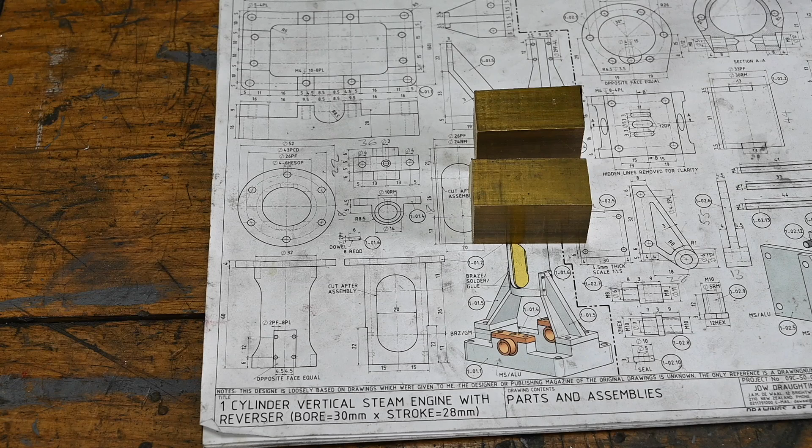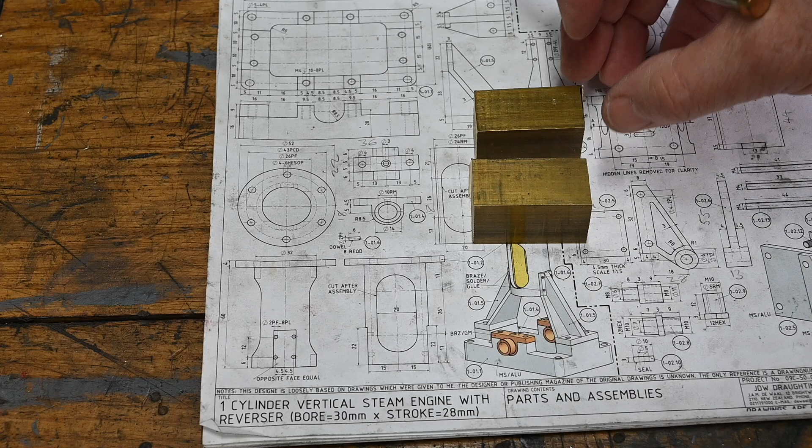Today we're going to do the crankshaft bearings, which are these two here. They should really be bronze, but as I've said in previous videos, this model is really for display. It'll only be run once or twice on air, so they'll be hard enough for that. This is what we're going to make them out of - a couple of small bits of brass from the scrap bin.

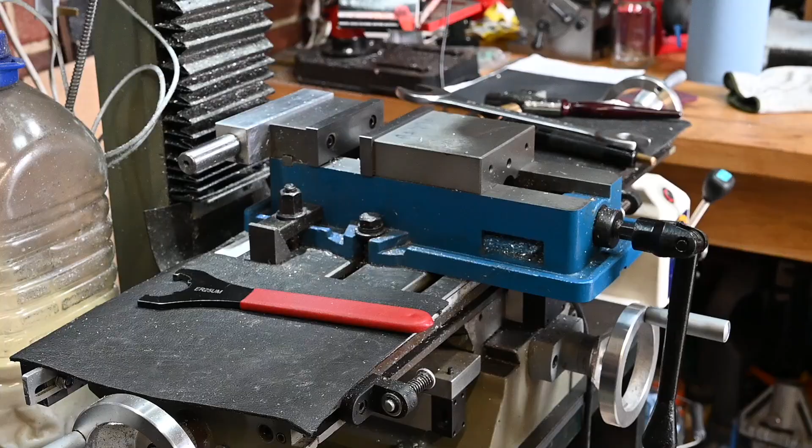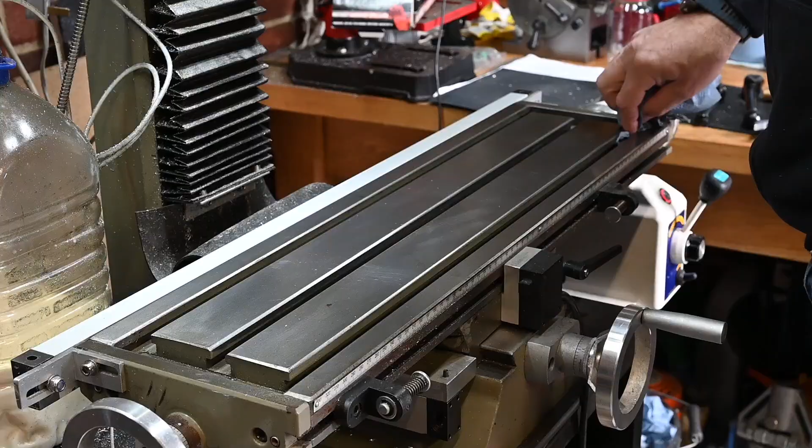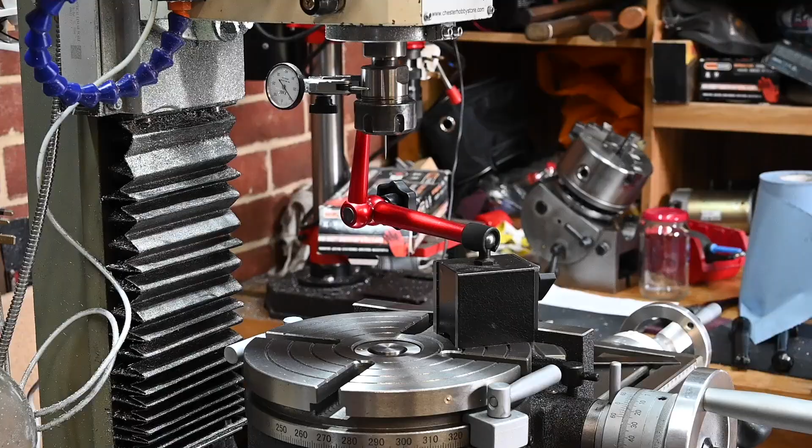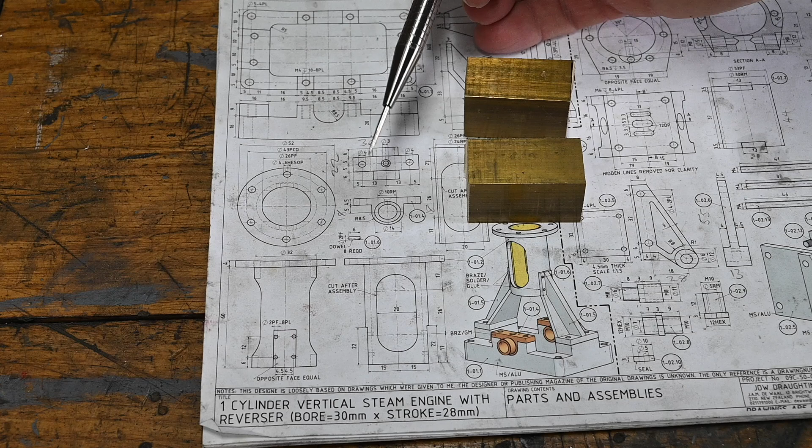Initially I set up the rotary table to do this, cut here, and then realised I wanted to do some milling first to tidy them up, but I'd already taken the vise off and put the rotary table on, so now I've put a little vise on the rotary table so I can get these sort of just machined down to somewhere near size, which is what we're going to do first. So over to the mill.

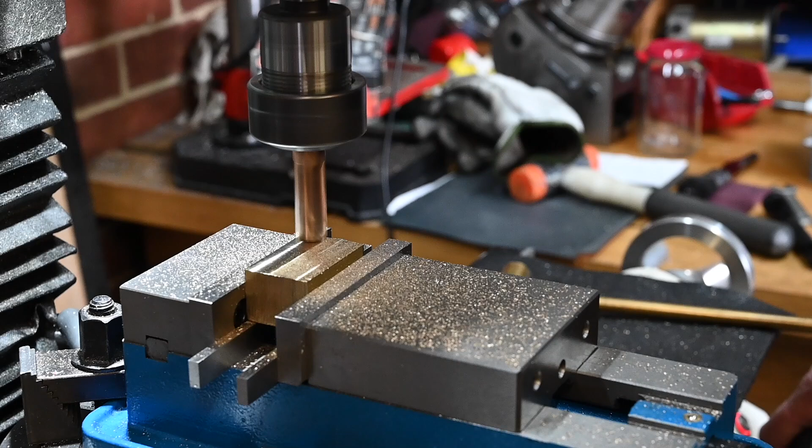Right, there's quite a lot going on in this video. In particular, there's some rotary table work at the end for such small pieces. There's turning, there's milling, there's work on the rotary table, there's precision drilling. So stick around right to the end, because there's quite a bit to see in this one. Goes on a little bit longer than normal, but it'll be worth it.

I'm just tidying this piece up, getting it all to not quite dimension. I'm going to leave it slightly oversized, but more or less to dimensions, so I can then mark it out.

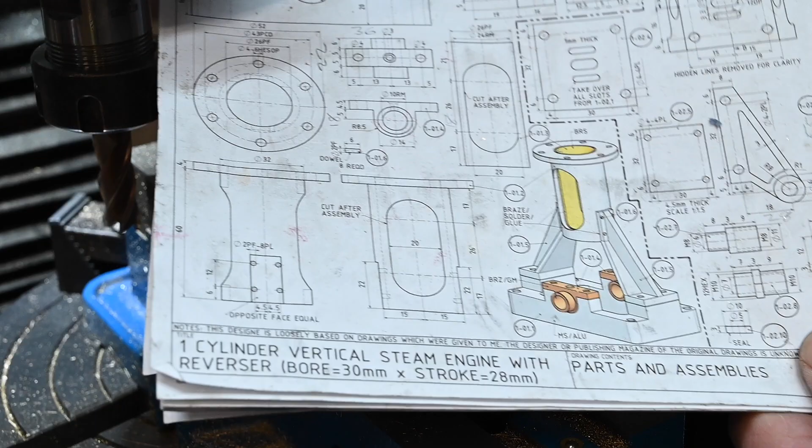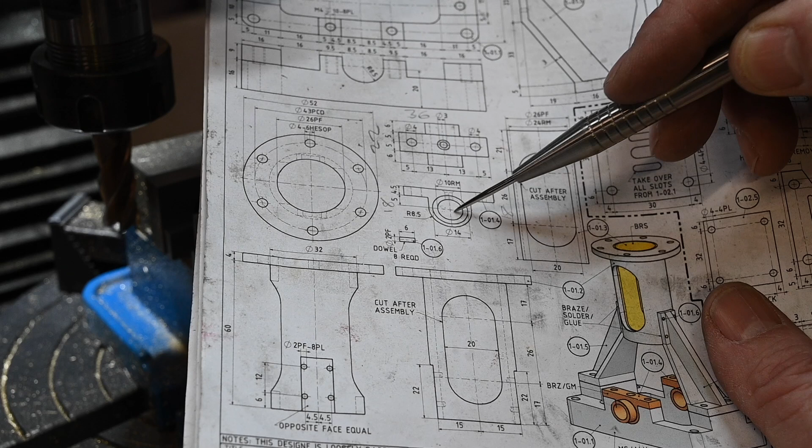Right, this is where we're at. This is the top face that we've just blued up. What I'm going to do is find the centre of this hole, and then I'm going to drill that out undersize - it should be 10mm reamed, but I'm going to drill it out undersize, and use that as the datum for everything going forward on the lining up of this piece when I put it in the 4-jaw, and when I use the rotary table to cut this piece. So that's our key point, getting that centre hole correct.

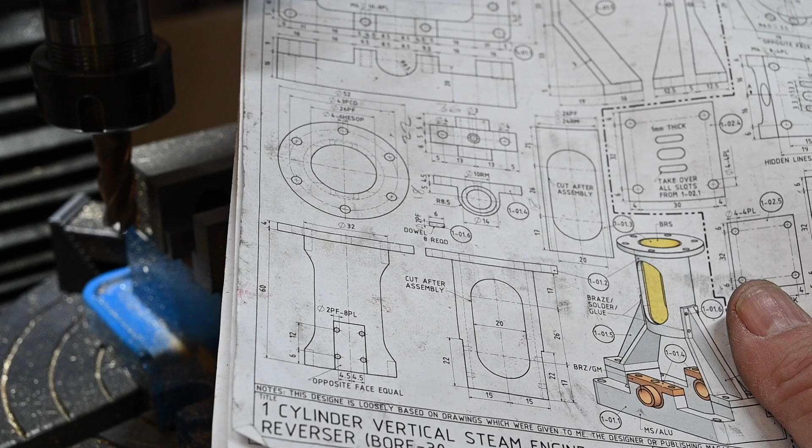Actually, I don't know why I blued that up, because I can actually find that centre hole by putting it in the vise. Using the DRO is going to be more accurate than me trying to mark it with a scriber, I think. Yeah, that's what I'm going to do.

Right, the tip is 4mm, so I'll just move the table back 2mm. That will put the centre of the tool exactly on the edge. Right, perfect - centre of the tool is exactly centre there and centre there. Now I can find the centre of my hole.

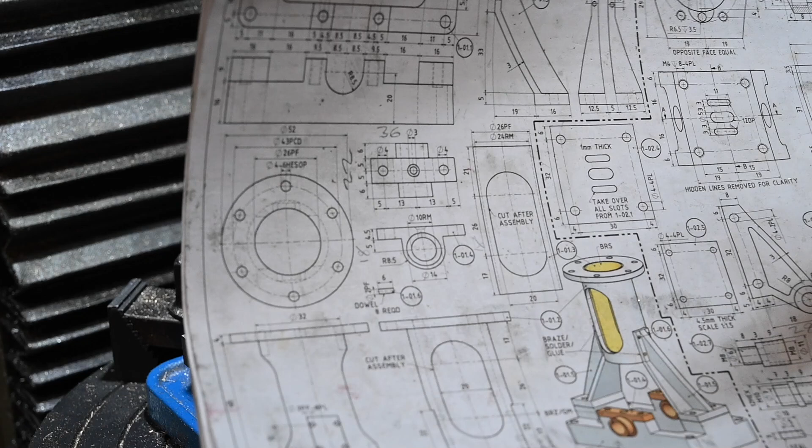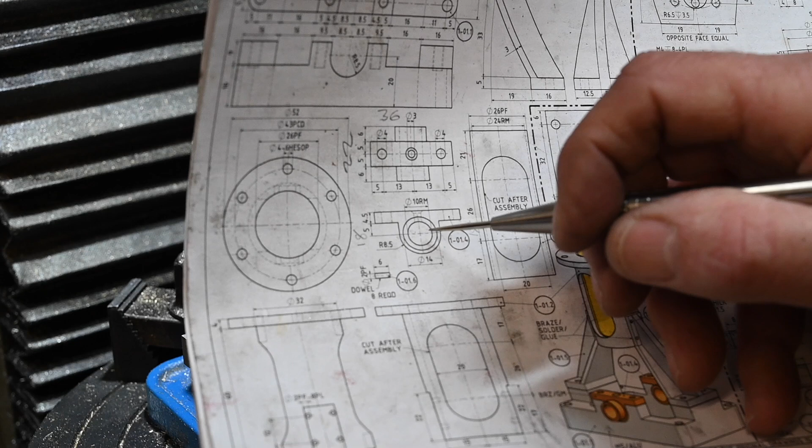I can now find this centre point of this hole. I'm going to ream that out to 5/16, because I've only got imperial reamers, strange as that may seem, but anyway, I'm going to ream it out to 5/16. I'll use some ground steel in the chuck to make sure it's centred all of the time. So I just got to find that measurement and then set that up.

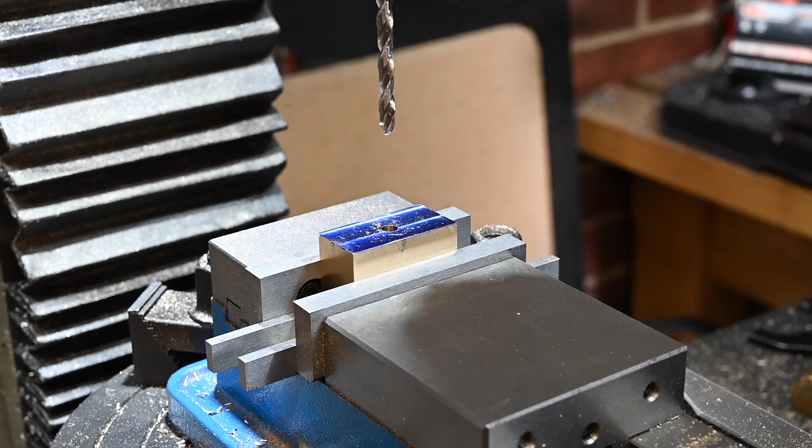I'm going to go in with a 5mm first, then I'm going to go in with a 7.3, and then I'm going to ream it to 5/16. Right, I'm just going to turn the speed down for the reamer.

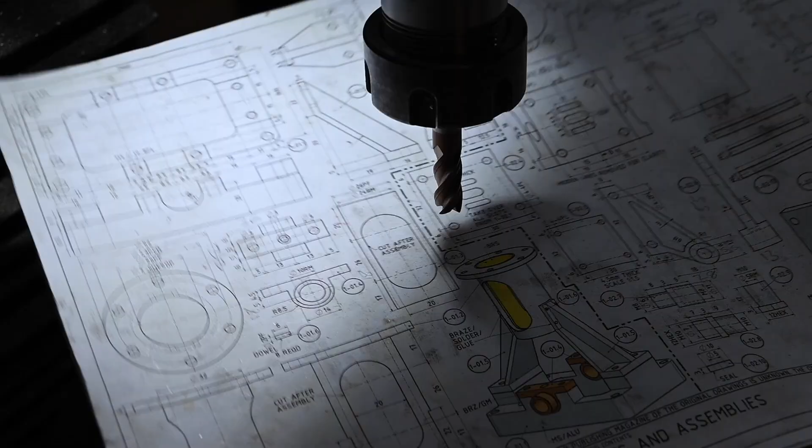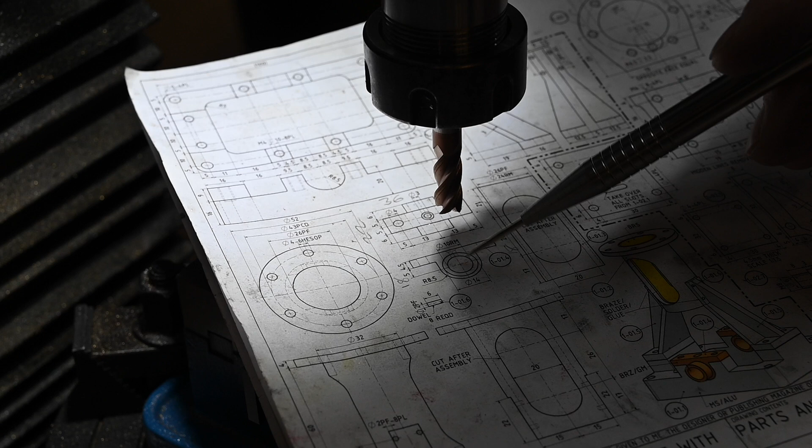Right, what I'm going to cut now is these outsides. I'm going to trim that down to make that 17mm so it fits in there. So I'm going to just square those off on both of them, and then I'm going to put them in the rotary table and turn this radius on there.

To set it up now, I've put it back in the vise. I've put a pin into the hole, and then I've used the edge finder on the edge of the pin to find the centre again. So now I can go out 8.5 either side, minus 4mm for the cutter, and trim them off.

What I'm doing here is trying the base on, because I want to make these bearings actually fit the base. There's a couple of thou difference between either side on the base, so I'm just trying the base on and getting each bearing to fit the slot it's intended for.

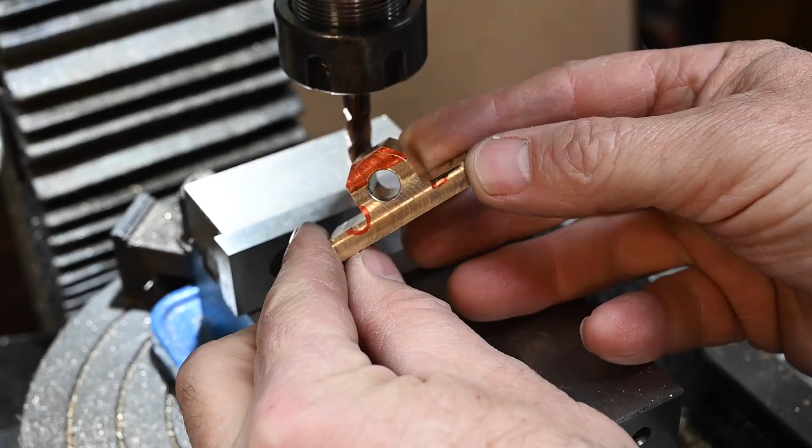That just makes it a little bit easier for when I set it up on the rotary table. It's a little bit less just to trim off the corners. But that's how it's taking shape anyway at the moment.

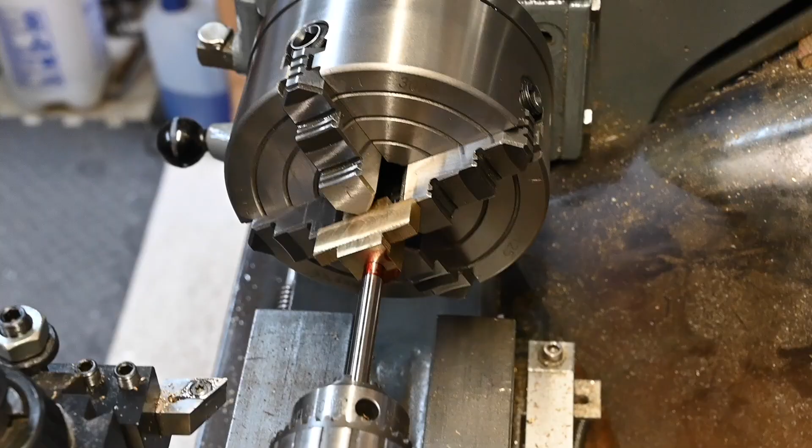It's been quite easy to set up in the chuck. I put the pin in, and I've now got perfect position to our datum, which of course is the center hole.

So what I'm going to do now is put the tailstock into there, put the live center in. Bring the live center in. Just have a look at that as it comes in.

Just a bit of gentle support, that's all I'm doing with that. I'm not putting any pressure on it, I'm just there to stop it from moving anyway. I'm fairly tight on the chuck, so I'm pretty good to go. I reckon I'll be able to get that from there. So let's spin it up and have a look.

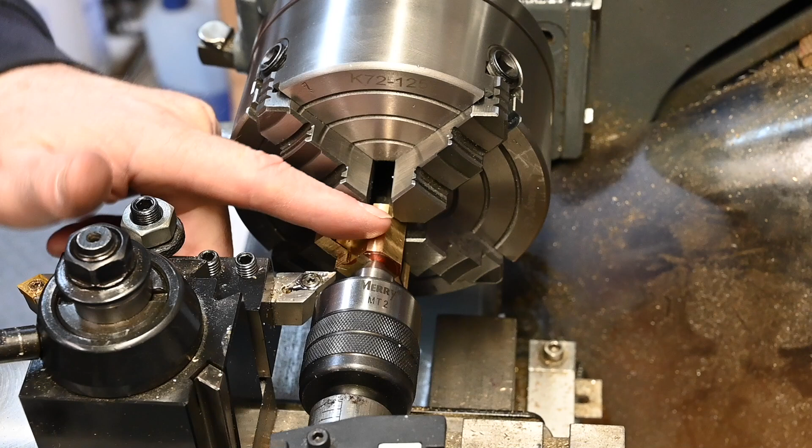Right, I've got to take 7mm off, leave 10mm in the middle, and away we go. Just going to turn the speed up a bit first.

Another 3mm off there.

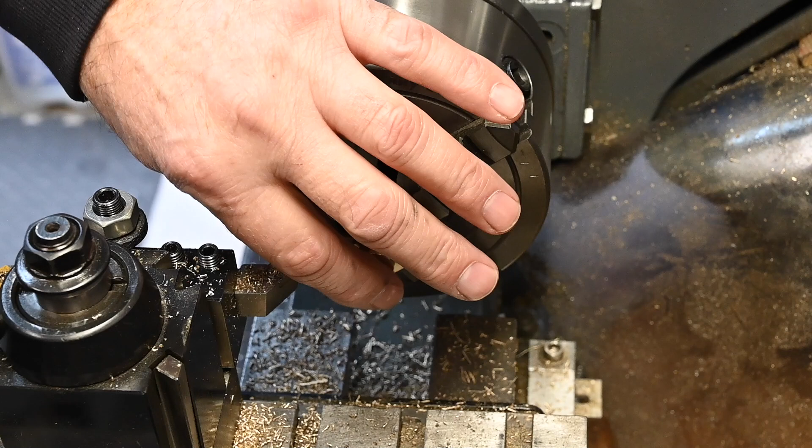Right, that's that one, down to dimension on this side. What I've got to do now is put this in a collet, but first I'm going to turn the other one to the same stage as this one, then I can put them both in the collet. Otherwise I've got to take the chuck off, put the collet on, do this one, etc, etc. But anyway, I'll do the other one up to this stage.

Just an alignment check, it hasn't moved at all. Spot on. Right, let's get that out the chuck and get the other one in.

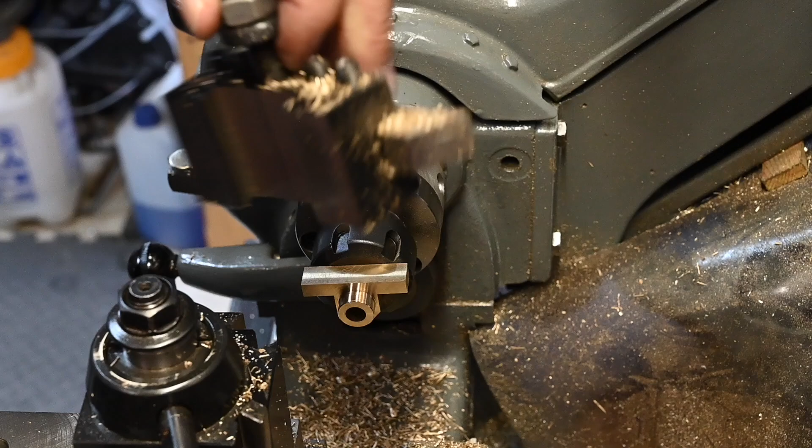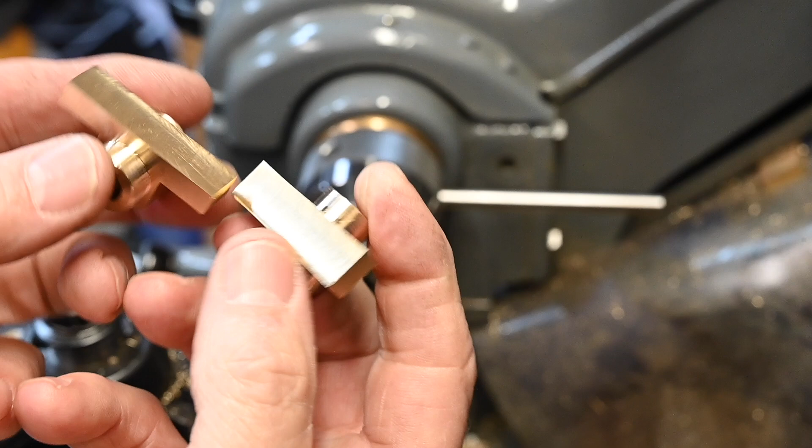Right, there we go. That's where we're at so far. All we've got to do now is put these two radiuses on there, drill some fixing holes and a couple of oiler holes, and that's it. It's going well so far, quite pleased with that. Yep, perfect.

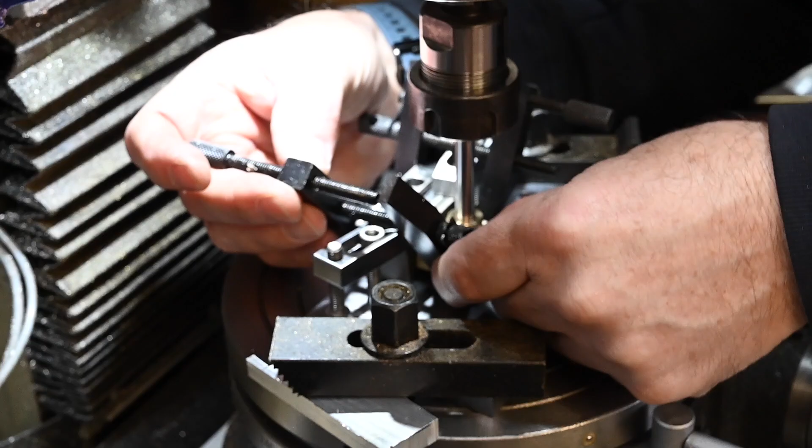There's the setup. I've got this set up to the centre pin, to the centre of the table. So I'm going to change the cutter out now, put a smaller cutter in there. Well, put a cutter in there - it's not a cutter at the moment. Offset what I need to be, and then I'm going to do the round.

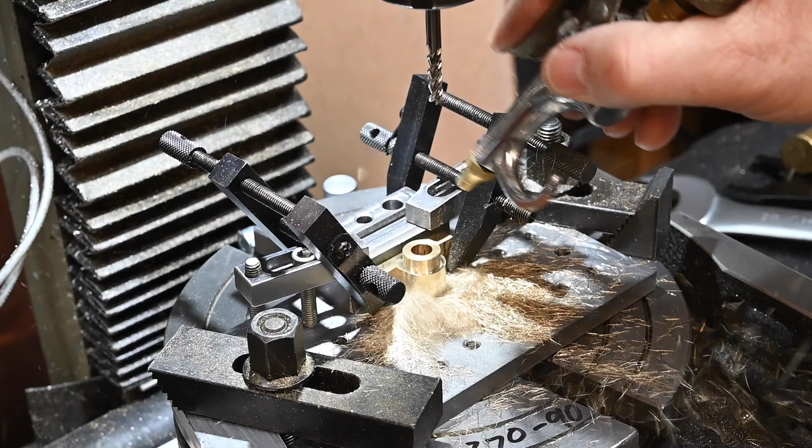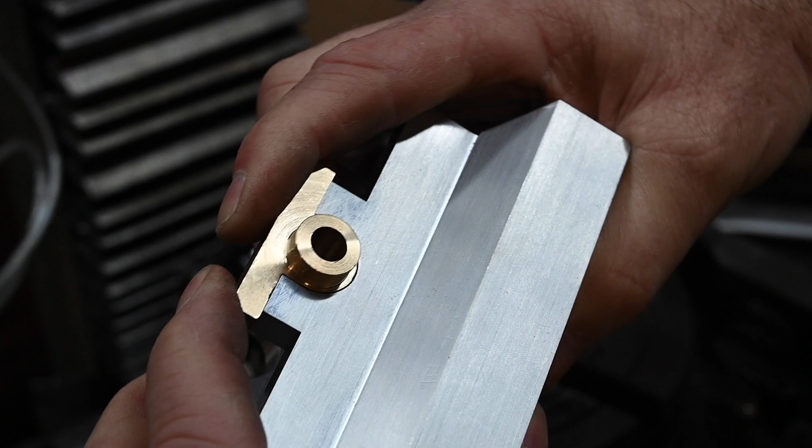Right, there you have it. Just got to trim the ends to suit now.

Right, let's get the other one set up. We've got the second one in now, let's get that done.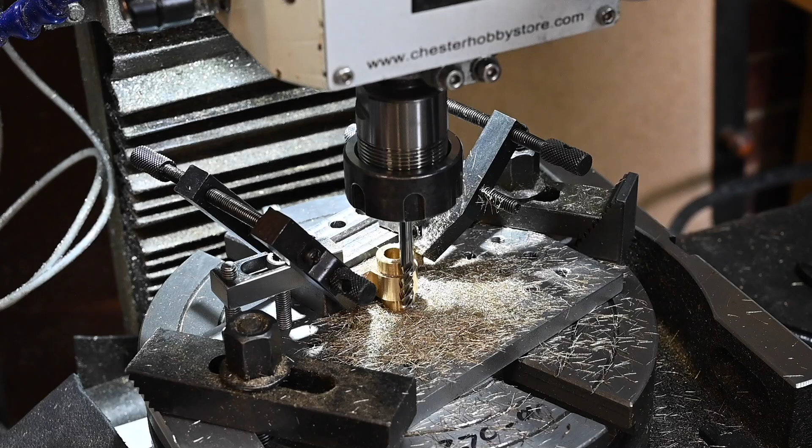Right, that's the brasses done. Well, I say they're done, they've just got to be trimmed off to end, and I'm going to put this in the vise and skim the top so that they're both parallel. The holes are drilled undersize, so I'm going to ream those all the way through with this setup in the vise vertical. Put a couple of bolts in each one and the center oiler. So that's the brasses done for the time being.